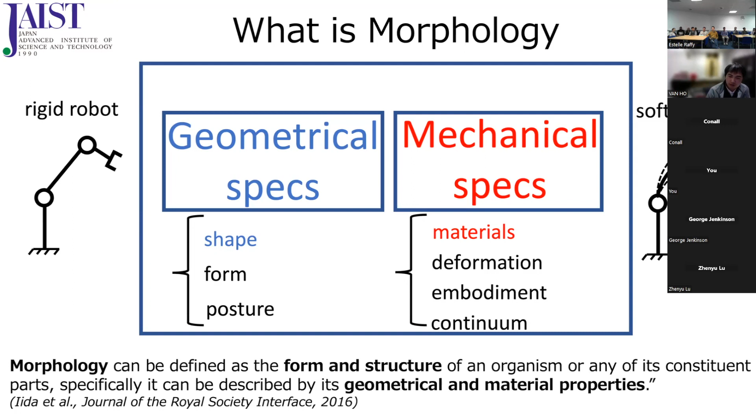So what's morphology? Well, I'm actually the mechanical guy. In my point of view, and also as Fumiya stated in his previous paper, when you're talking about morphology, probably there's another field with a different definition, but point of view-wise, when you talk about a robot's morphology, it should include the geometrical specs, including shape, form, and so on, and also the mechanical specs, which also includes material properties. So we have many definitions or understandings of morphological computation. Here we use the term adaptive morphology, to see, okay, so it can be intelligent or not.

Imagine you have a kind of fixed morphology, like a rigid robot, and it tries to interact with the outside environment. Usually you need to do a lot of computation, right, for, let's say, position control or force control, to make sure the interaction is good. But what if you have a morphology that just adapts to the environment, without any further control and computation? So intuitively you can imagine that the computation you used before for the fixed morphology is kind of offloaded to the body, right, which means the body itself is also part of the intelligence, and the computational burden can be offloaded from the central controller to the morphology, as Rolf also indicated in his famous paper.

So what is adaptive morphology in robotics that I found? Maybe this is related to our previous PhD research, more like 15 years ago. At that time, we used soft hemispherical fingertips. On the right side, you see with the green objects, two soft fingers hold an object, and with all the disturbance applied to the object, it still holds it firmly. Imagine if you have two rigid fingertips, even with small disturbance, the object will fall out of the hands, or else you need to do a lot of complicated control to make sure the objects are stable.

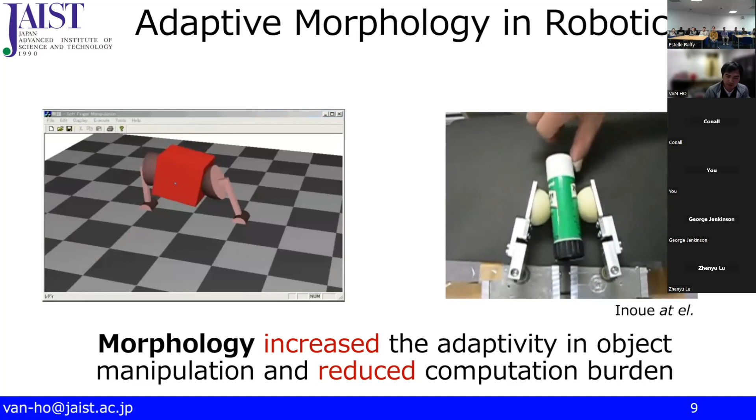On the left side, you see some kind of one-DOF fingertips trying to hold an object. What you can see in this case is even with only one rotation for each finger, you can actually do in-hand manipulation. Imagine if you have two rigid fingers and you want to do dexterous manipulation like that, you need very complicated control, and probably more DOF for each finger. So in my point of view, morphology can increase adaptivity in object manipulation, and I think soft is something very interesting.

So far our research is based on what I explained before, so we'll see how we conduct our research here. We care about the body, of course, and also the environment that the robot works with. Different from ChatGPT, our robot has a body and it needs to interact physically with the surrounding environment - that's something that differentiates our robots from a thing like ChatGPT. We also think that interaction between the body morphology and the environment is very important to realize robotic functions. This is the path we went through when we conducted our research.

And so hereafter we'll try to use our research to persuade you about what I mentioned here.

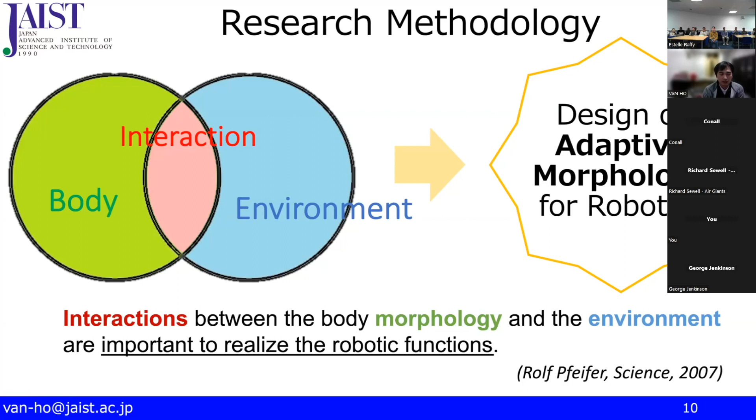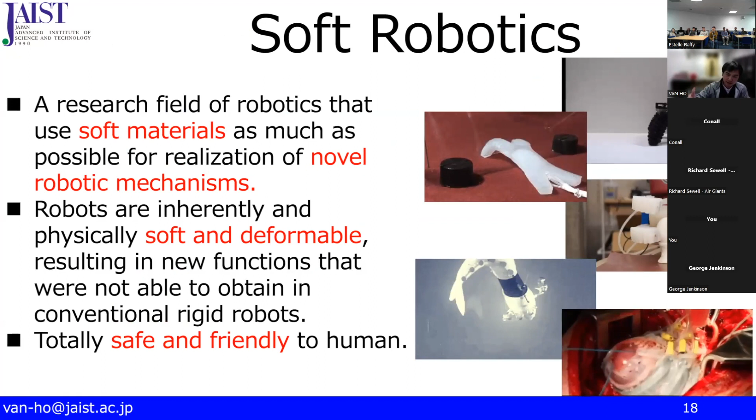As Fumiya also mentioned, there's many kinds of adaptive morphology, even using the rigid body, like the hopping robot that Fumiya made. But also, as we know, soft robotics is very much suitable to conduct or implement adaptive morphology, thanks to the inherent softness and deformation. It's also safe and friendly to humans—imagine something going inside the body, you don't want it to be too rigid. But it's also very challenging to be a completely soft robot.

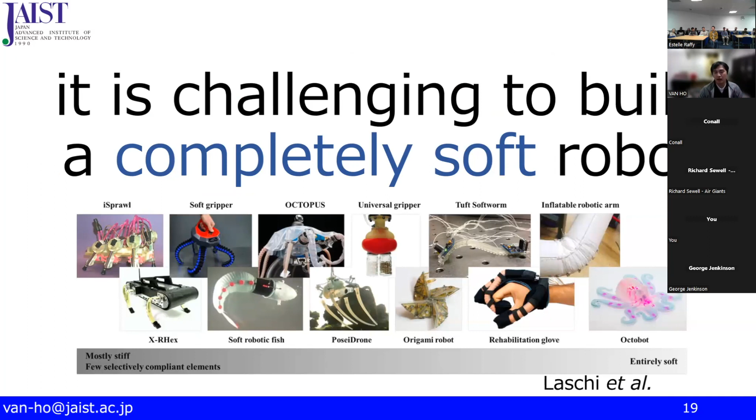This is a very nice summary from Cecilia about the series of robots and their softness. You can see it's mostly a mixture between rigid and soft; there's a very rare system that's totally soft, because we have the computer and everything else as well.

In my point of view, it's very good to introduce softness to the robot for realization of safe, agile tasks. This is what we also focus on, and we focus more on the mechanical approach, not that much on functional materials. Currently we focus on soft sensing, biomimetics, and interaction. I'll try to introduce mostly sensing and biomimetics, and if we have time, I can talk a bit about the interaction point as well.

About soft sensing—this is also one of my long-term research topics, and also maybe one type of morphology computation that Fumiya mentioned before. It's not really about making a specific sensor. What we really care about is how the softness of the sensor may contribute to or realize different kinds of sensing activities, even with active shape changing and dynamic interaction with the environment.

On the left side, you can see that any sensor embedded into a deformable object should not be fixed—it may change its posture and sensing output based on the self deformation and interaction. So if you have a system that can actually change the body, you can expect that with one type of sensor, you can get different kinds of sensing ability.

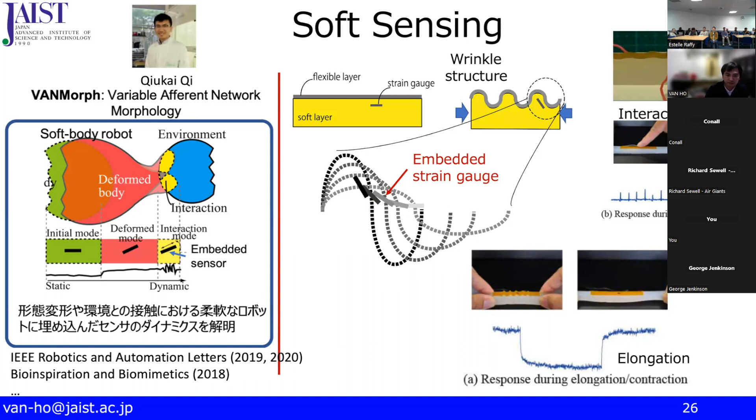Okay, so another kind of sensing that we care about is that soft sensors are very much easy to be damaged. So in this case, what should we do?

We can, based on deformation and morphological optimization, find a way to locally change the morphology, like routing the strain gauge sensor embedded into a whisker. So when the whisker is broken in some part, by tuning the inner pressure surrounding the strain gauge, you can actually compensate for the contact location sensing as well.

This is quite a complicated one, and I cannot explain it in too much detail, but if you're more interested, Helmut is also one of our co-authors, so you can ask him.

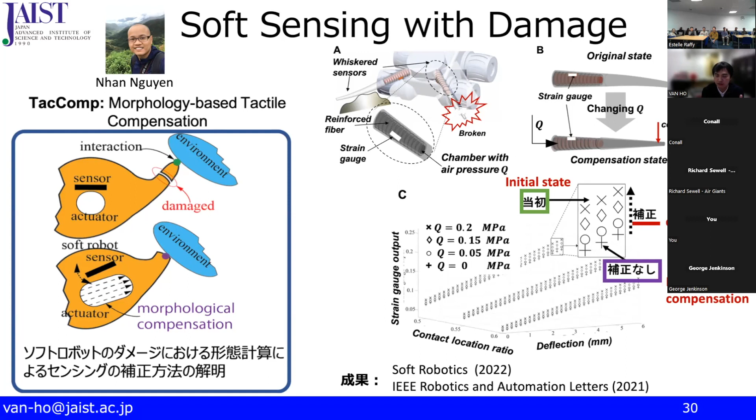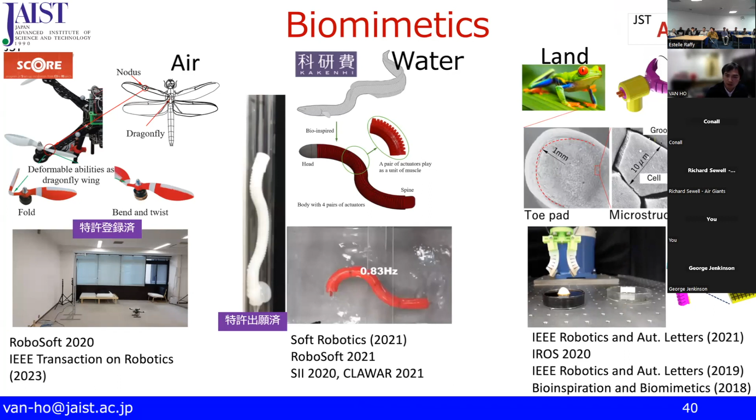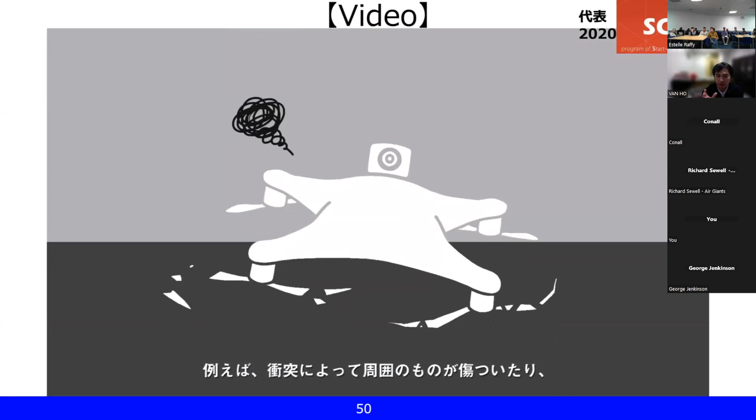Today I would introduce a bit on the drone, and also the gripper. This is a PR video that we made for our research. Usually, you know, drones are a quite dangerous object, because when there's a collision, they may cause damage, and the propellers might be broken and the drone drop off, which is more dangerous for the human as well.

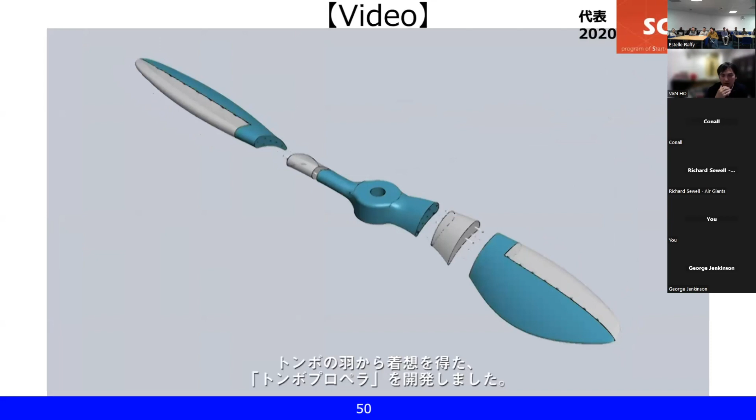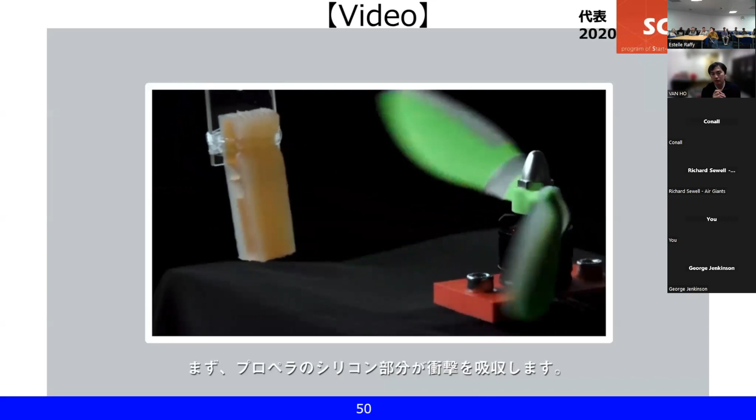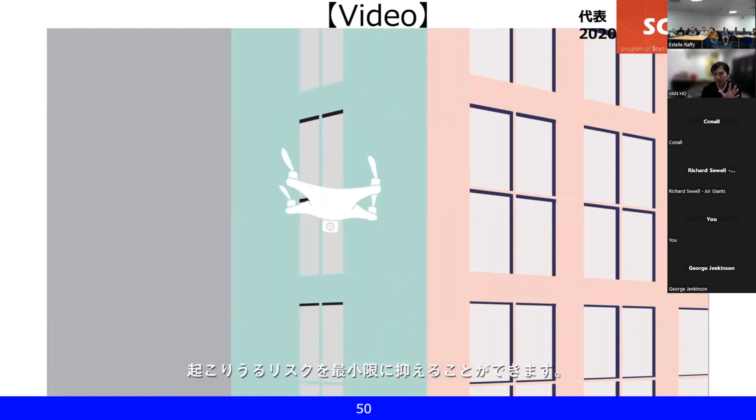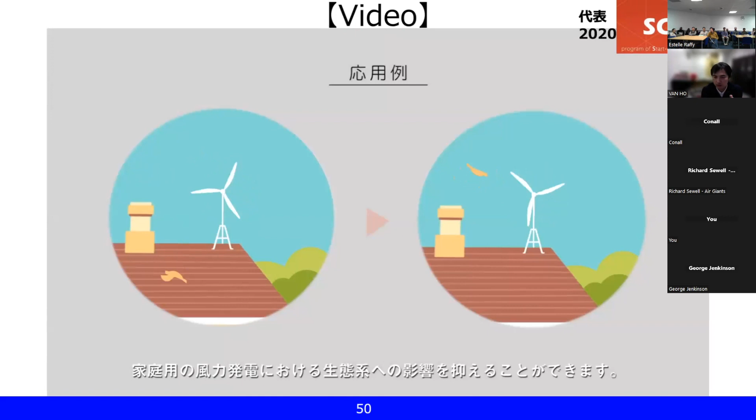So here we were inspired by the Tombo, the dragonfly wings, where they have some kind of hinge that we can actually use to soften part of the propeller, and you can see here the resiliency that we can obtain for the propeller after a collision. So you can imagine if you put these propellers on a drone, even if there's some collision, the propeller will not be broken, so you can recover from the collision as well. This is quite promising if you fly the drone near humans in the future. So this is the animation.

So let's see the real system that we propose. We softened part of the propeller with some kind of silicone, and we also have fiber-reinforced nylon here to increase the strength of the propeller. There's some research that tries to make a totally soft propeller, but in that case it's very difficult to generate enough thrust. So in this case, you can see there's a mixture between the rigid and soft parts.

The number 2 part is where the thrust is created, and only when the collision happens, the soft nodus, which we call the soft hinge, go into action to give some resilience after the collision, as you can see. Because collisions are also very diverse, in this case you can see that under any kind of external stimuli, the propeller can still respond well.

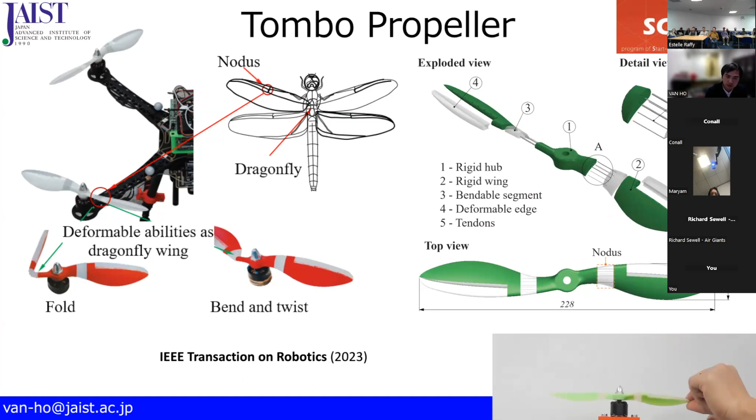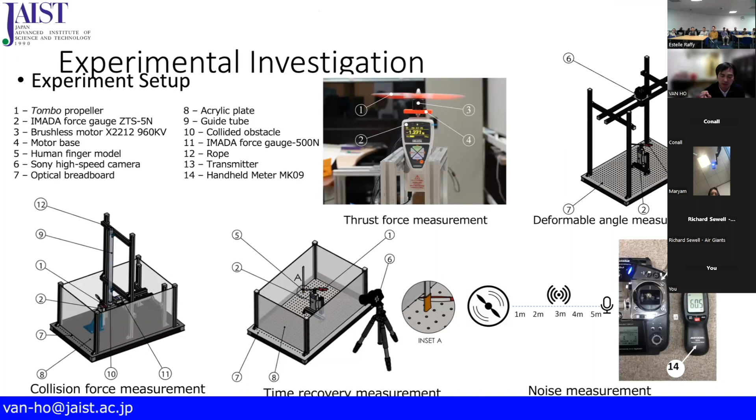So the question is, okay, can this propeller be used for flying a drone or not? That's why we set up a very nice experiment to measure the thrust, the noise, and also the collision and recovery time—a lot of factors. We also created many kinds of morphology of the propeller to test the durability and collision resilience as well. I'll just introduce some parts here.

So if you can imagine having very neat fabrication of this propeller, you can actually expect quite good durability for flying on the drone.

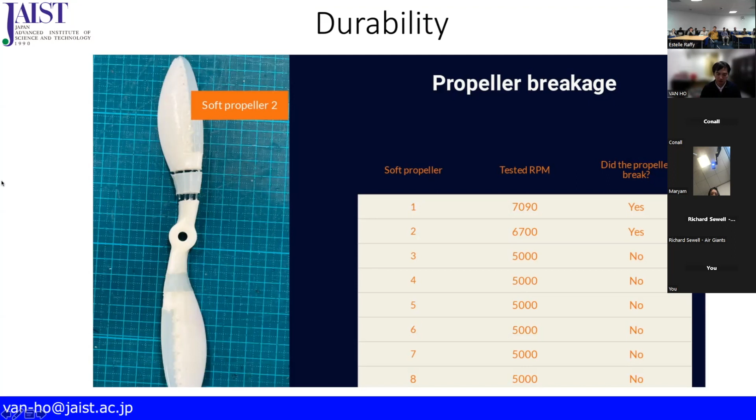You may also ask, is this safe for humans or not? So we tested that as well. Here we have some sausages going in contact with the propeller. At low rotation, like 1,000 or 2,000 RPM, it's still okay, but at 5,000 RPM it's not safe anymore. So I cannot say this propeller is totally safe for humans to interact with, but you can expect that it will reduce the collision force in any case. We measured and found that at least one-third of the collision force can be reduced by using this soft propeller.

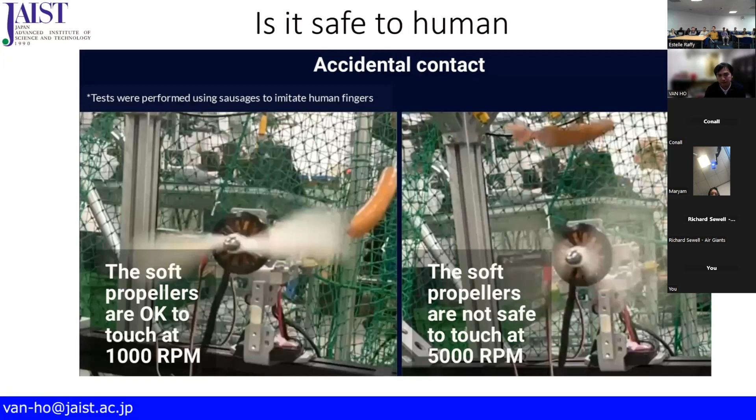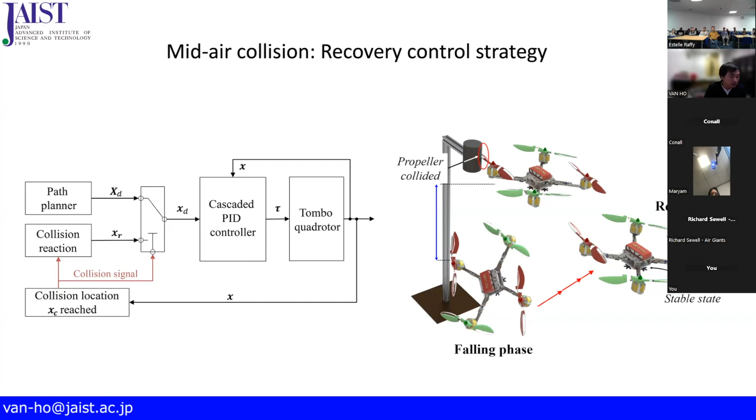So here is how we put the drone on the tracking system, and we also test the recovery and resiliency of this drone upon collision. The control is also very simple: by external tracking system, we know where the onset of the collision happened, and we switch to another control to make sure the drone will go back to the previous state before the collision as much as possible, with the belief that the propeller will not be broken. This is also related to Type 1, the morphological computation, as Fumio mentioned.

So this paper is actually a long-term collaboration with Giuseppe at NYU, and the paper was just accepted this year in TRO. You can see more in terms of operation in this video.

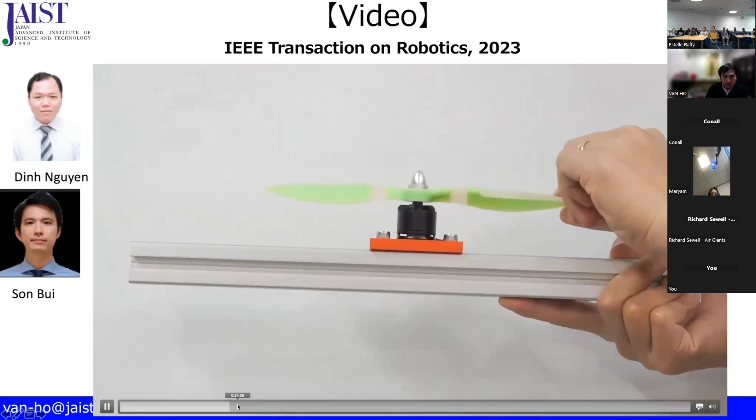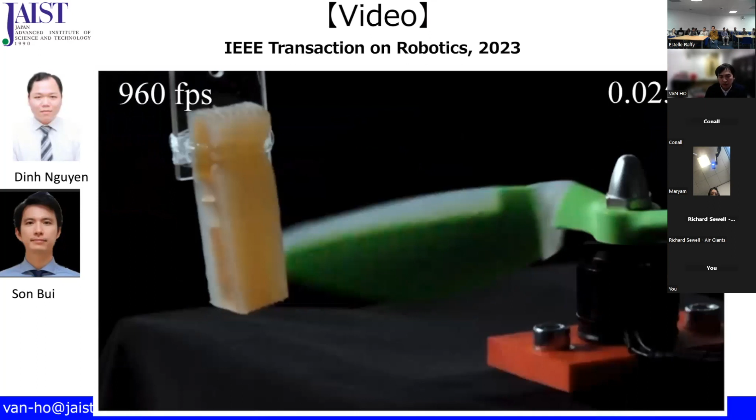So here, with the twist, the folding, bendings—totally okay—and with contact with soft objects, it also can recover quite well. And it's still working for the drone here: a 9-inch propeller works for the 1.4 kilogram drone, which is pretty much enough.

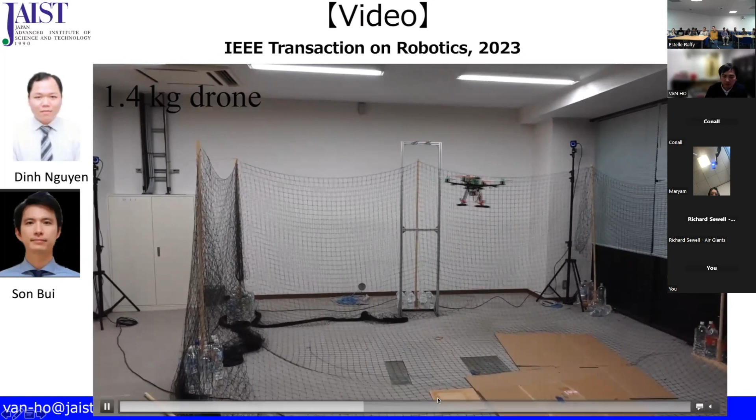The most important thing to see is the collision, and what happens after it. So we flew the drone into a 2-meter high obstacle to see how the drone reacts. Usually the drone would drop. After the collision, the drone may drop a little bit in height, but after that it can recover back to its original state, so the drone will not drop.

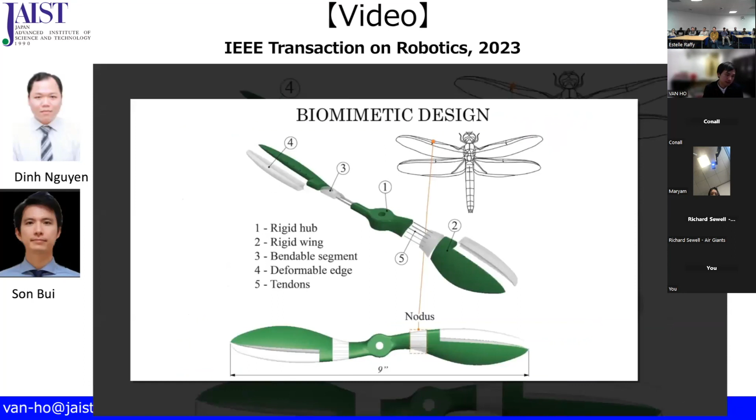I think this should be pretty significant for the system. It's all about the drone with the deformable propeller. You can see here the small deformation. This can actually increase the safety and also the resilience of the whole drone, which is very important for the system.

The other example is our recent development of soft robotic hands or grippers. We see a lot of designs in soft robotics for hands or grippers, like the origami one, the finger one, nets, and also a recent novel design using a tangle mechanism for gripping objects.

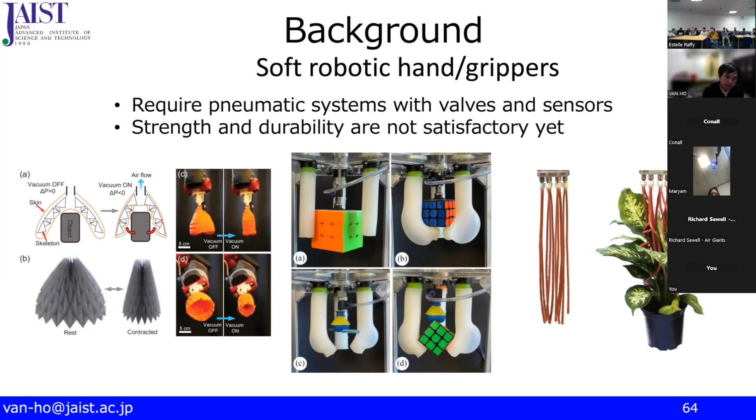Most of us always think soft robots should use a pneumatic system with valves and sensors, but sometimes if there's a scratch or hole, it's done—you cannot make it work anymore. Of course you can use self-healing material, but it will take time to recover.

In this case, we were inspired by the blossom of a flower. If you look back at the blossom system, it looks like twisting, or rotation.

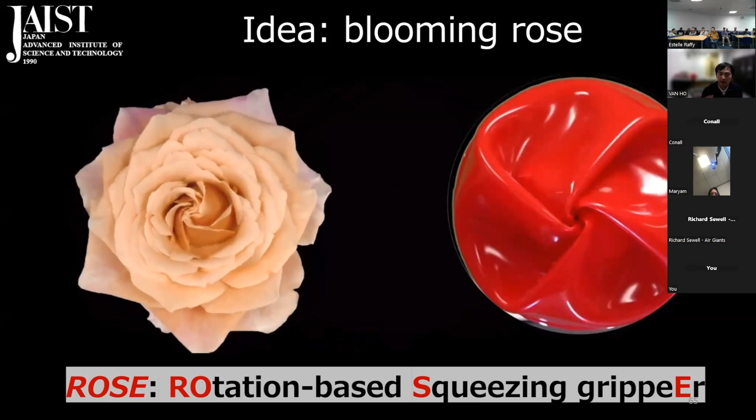So here we propose ROSE, which we call a rotation-based squeezing gripper, and we try to make it look like a rose. The name fits the shape quite well. With normal rotation and buckling of the surface, it actually closes the gripper and can embrace the object.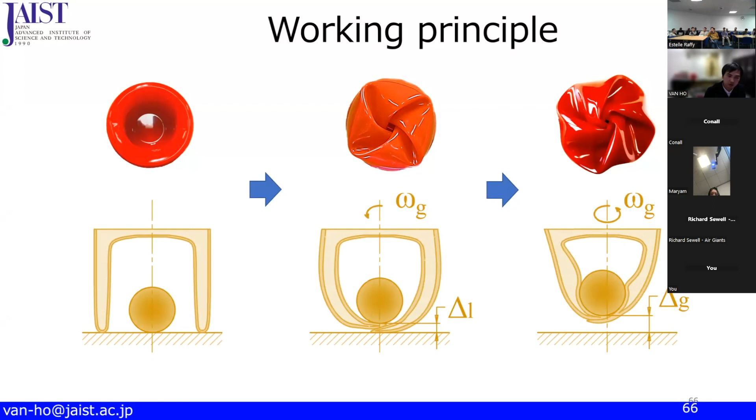This is the working principle: any object goes into the space formed by a funnel-like shape, and then you start rotating it. It buckles from inside to outside and starts to squeeze the object. At that point you can be confident to lift the object without any complicated control strategy. This is the design process.

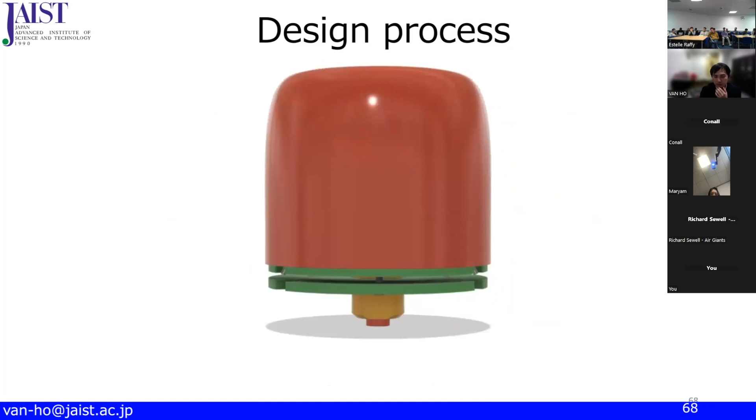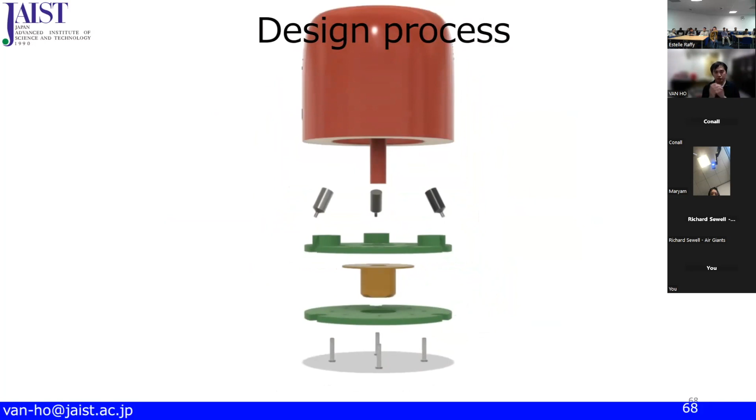You can see this continuous membrane from inside to outside, looking like a flower, and also like a funnel. The parts are very simple: we only have the funnel, the fixed base that holds the outer layer, and the inner base that can rotate. You rotate this inner part, and the buckling happens from inside to outside, finishing with squeezing the object. That's the whole idea of the design.

We have embedded cameras to see markers, as shown in the design before, to observe how the buckling happens and the state between the object and the finger. These designs are very simple. Let's take a look at the performance.

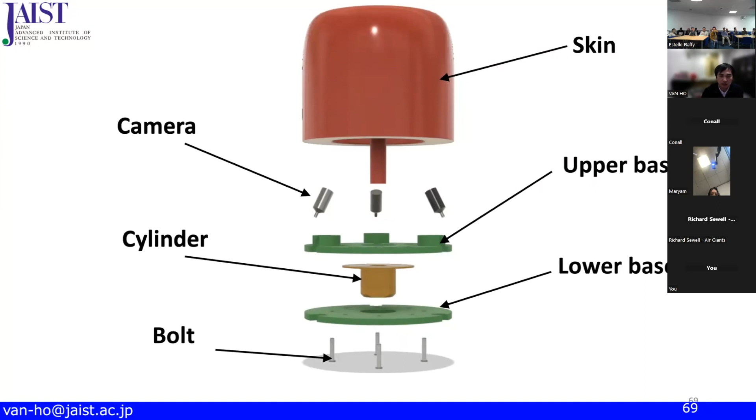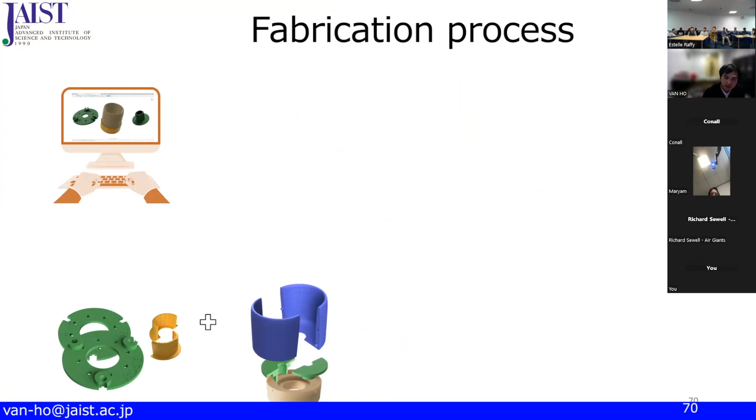For fabrication, we went through many methods, but they didn't work very well. Eventually we came up with a simple method: we just pour it from the top, and due to gravity it goes down and covers the surface, then cures under certain circumstances. If you want to change the thickness, you can pour it one more time, or even three times. Due to gravity, the tips end up much thinner than the base, which is good for making the buckle happen easily.

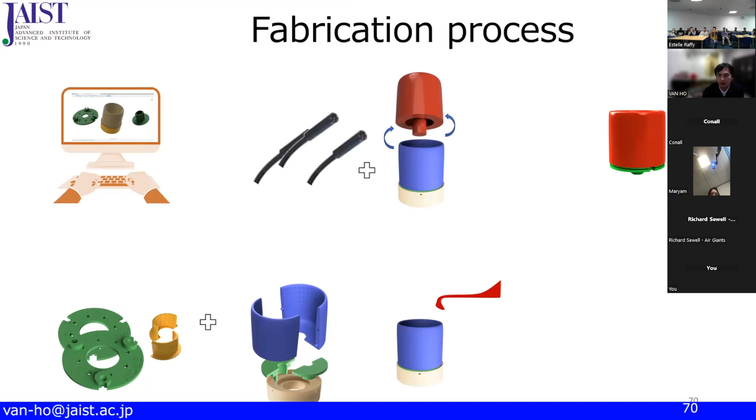After that, you just take it out—it's a one-shot fabrication, and you get the entire skin. You can scale this quite simply with this system.

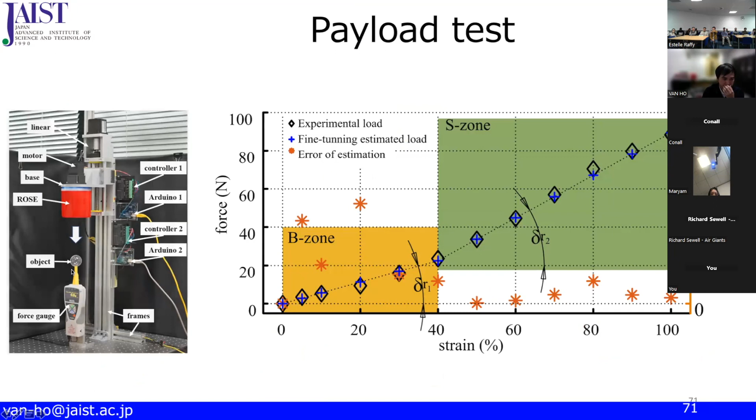We also tested with payloads. For this payload test, we tried to pull an object, attaching a force scale, and surprisingly it only broke at more than 300 newtons. So for this pulling test under very nice conditions, with a several-hundred-gram ROSE gripper, you can grip about a 30-kilogram object.

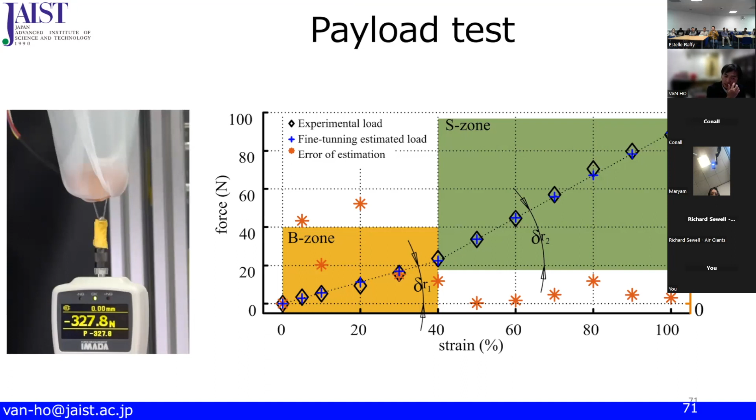I don't say it can grab a 30-kilogram object anytime, but in this test, maximally it can go to 30-kilogram force, which is quite amazing for a soft object.

We also tested the repeatability. One nice thing about this design is that we use rotation, so you can use the rotation from the end effector of any kind of robot arm. It's like plug and play, and you can replace it within like 5 seconds. You plug it in, rotate, and it works for you. Of course you need some change in terms of rotation speed and angle, but basically it takes very little time to change.

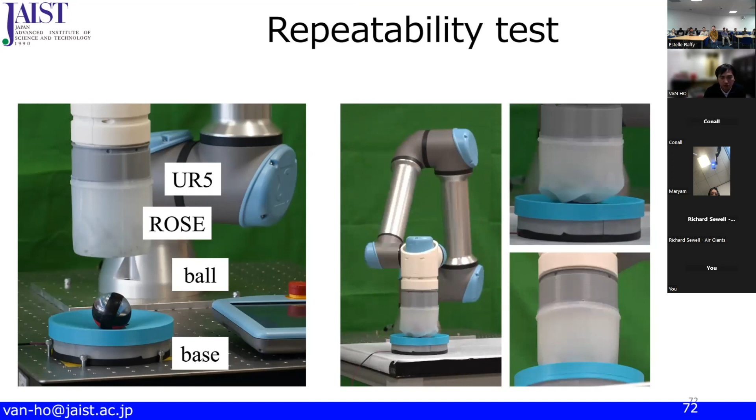So we tested with this task: take an object, pick it up, and then release it. And I guess how many times we could do that. It can be durable up to 400,000 trials, which is quite amazing for me as well.

After 400,000 trials there's some kind of crack here. But the good thing is, because this design uses no air, even with a small crack the buckling still happens, and you can still grab the object without any change or complication in control.

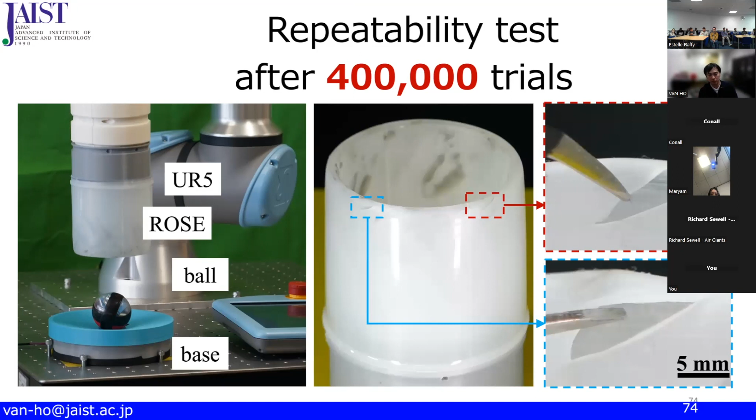So this is a demonstration of the grabbing. The related content was presented at RSS this year, and it was also a best system paper award finalist.

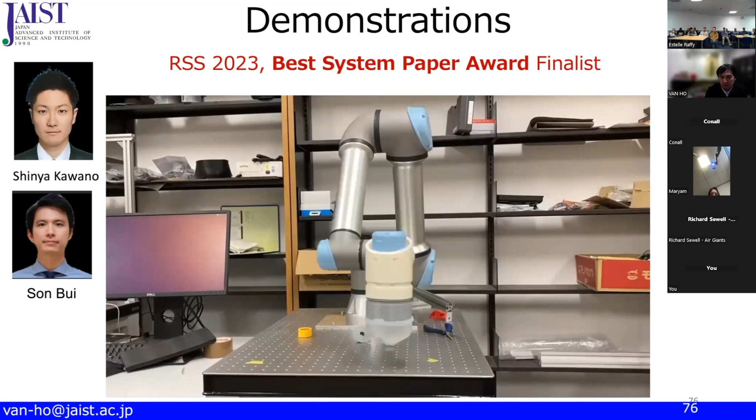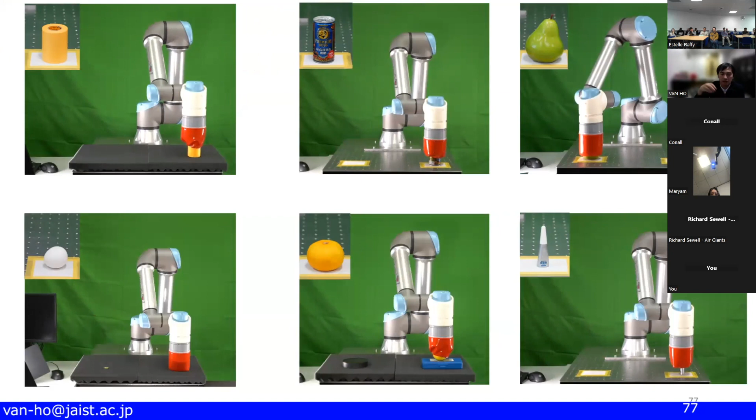You can see here how you can grab an object, place it, take it away, and place it on another one. Quite simple, right? As long as the object is small enough compared to the size of the gripper, you can change it and grab any kind of object. We tried it with different kinds of fruits, cans, and other soft objects.

So you can imagine using this for harvesting fruits on trees, something like that, and even working at an assembly line given all the durability it performs.

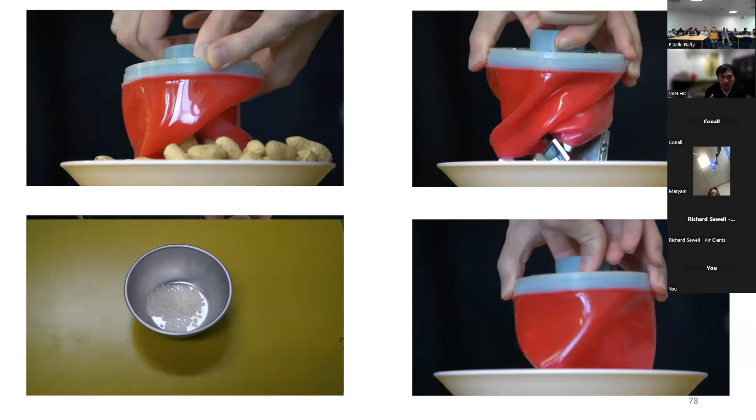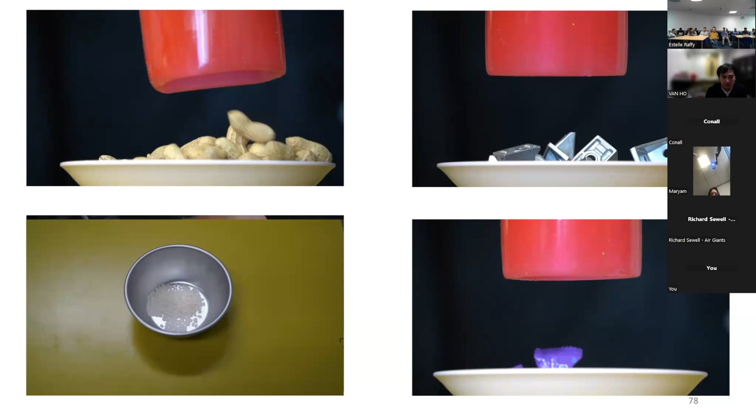It also can work with granular objects. With the squeezing action based on the rotation, whatever is inside the gripping space, it can get it. We also tried a very difficult task: taking a boiled egg out of an olive oil tank.

This is already very difficult for humans, because it's very slippery and almost impossible to use chopsticks in this case. But using this gripper, because it can squeeze everything inside, even in very slippery conditions the roll still works and brings everything in, grasping the object with a very simple design. I think this is also a very typical example of the type 1 that Fumiya mentioned, on how we can simplify the controller but still get the work done.

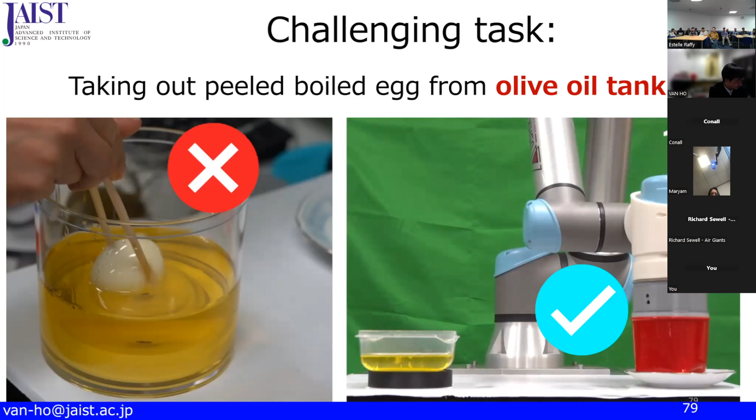For the robot. Okay, we have about 5, still have several minutes left. So I'll move on to some of the interaction work we've been trying to do so far.

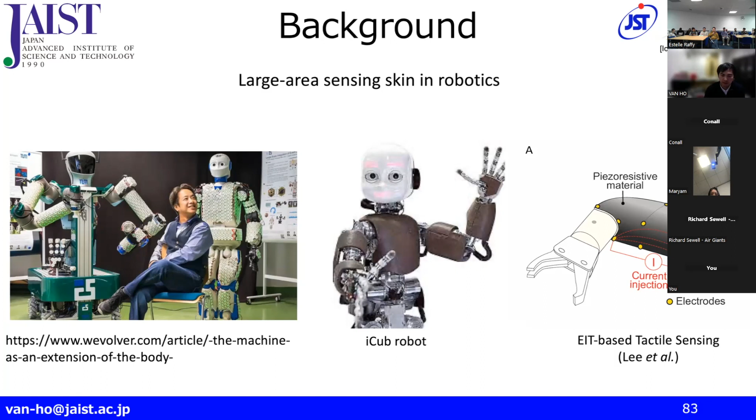We want to make a large-area sensing skin for the robot. Usually, for large area skin, you need to tie up many sensing elements, which causes a lot of difficulty in wiring and data processing. We also think of Baymax, something we wish could be in our life—working close to humans, interacting safely with them, with softness and whole-body tactile sensing like that. So we hope we can do something like this.

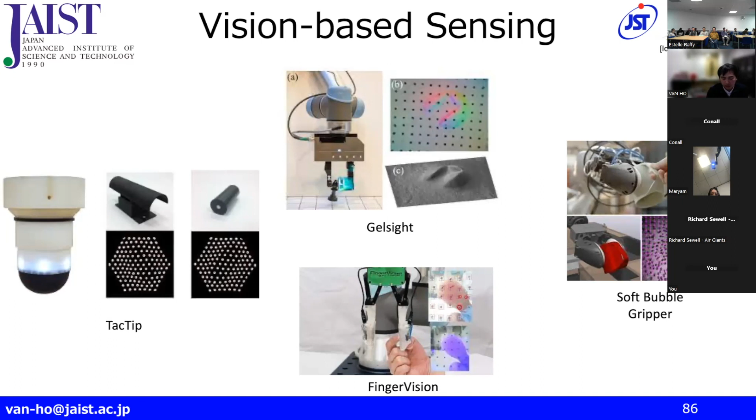We all know about vision-based tactile sensing, like TacTip from Nathan at Bristol Robotics Lab, and also GelSight, FingerVision, soft bubble, and other things like that. But these systems are only for small scale, like a robot finger and hand. Our aim is a bit bigger, like the whole arm or whole body. Using a vision-based camera you can do a lot of things with a simple design, and with computer vision and machine learning approaches, you can do a lot as long as you give a good design for the system.

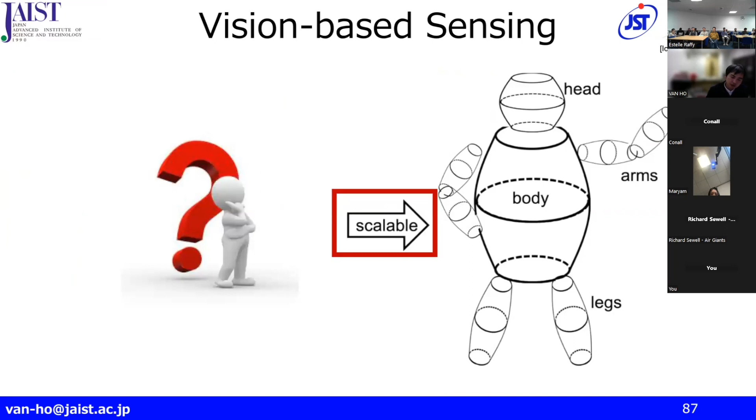So our aim is to build a system that can be scaled up to the whole robot body—arm, legs, something like that. We came up with a barrel shape, like a robot link or a human arm. We have a soft skin, quite long, and two cameras placed at the two ends. These two cameras track the change in position of the markers inside, quite similar to TacTip anyway.

Based on that, we can construct a three-dimensional model of the skin, including the deformation. So we know where the contact happened and what the contact depth is. We actually made one with a bone, because the robot usually needs some strength. But since we have two cameras here, we cannot use a normal bone.

But if you use some kind of transparent pipe that's stiff enough, you can let the camera see the soft skin surrounding it, while still giving enough stiffness and strength for the whole robot. We hope with the barrel shape we can scale up to the whole body of the robot with this technology.

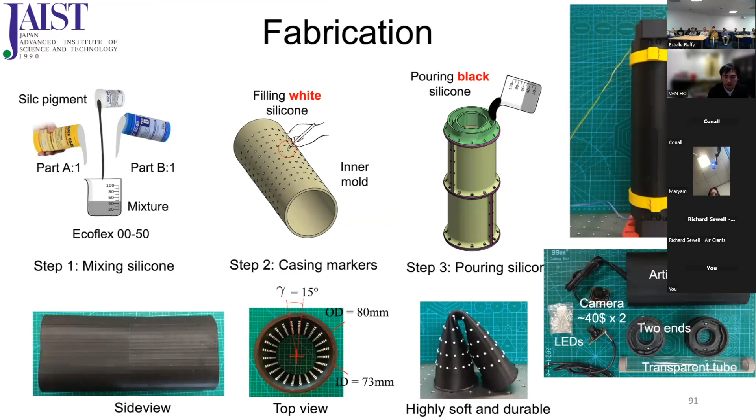So in terms of fabrication, we spent a lot of effort, but with the technology we have, we can mold all the markers and the skin at the same time. The skin we made here was probably made 4 years ago, but it's still here and can still be used in our system now. So the durability is very much amazing with this fabrication process.

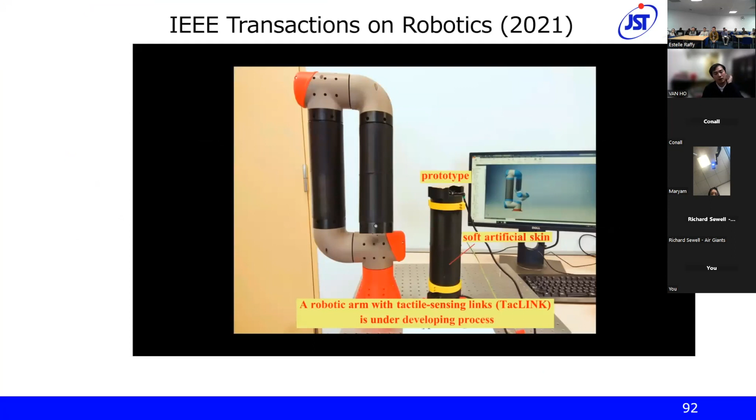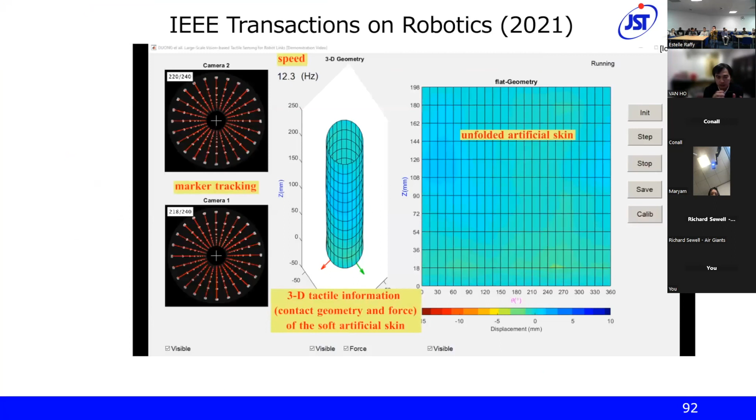This is our first paper on this system, where we use an analytical approach: we build up an FEM model, take the deformation information, and try to synthesize it into the normal force using the FEM method. This is real time.

This is real time, and you can see how it can detect pretty much the interaction between the object and the body as well. But it's quite slow because, as you know, FEM is very time consuming in computation.

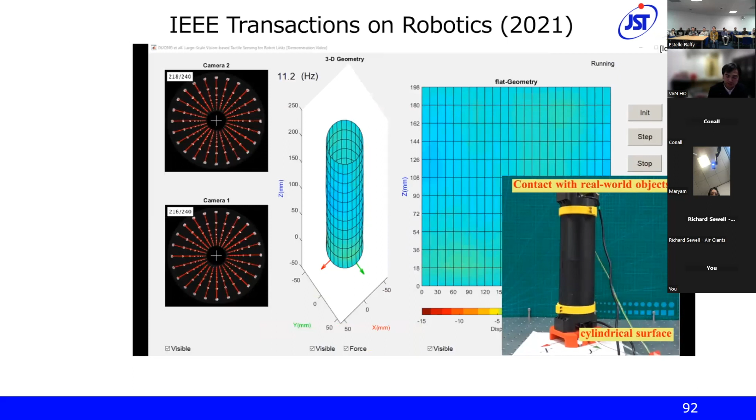So we came up with another way by developing a digital twin of this system. We use SOFA to represent all the mechanical properties, and transfer all the data to Gazebo to use the virtual camera model to get the simulated image. With this pipeline, we can represent all the physical properties of the system, including the skin and the contact between the object.

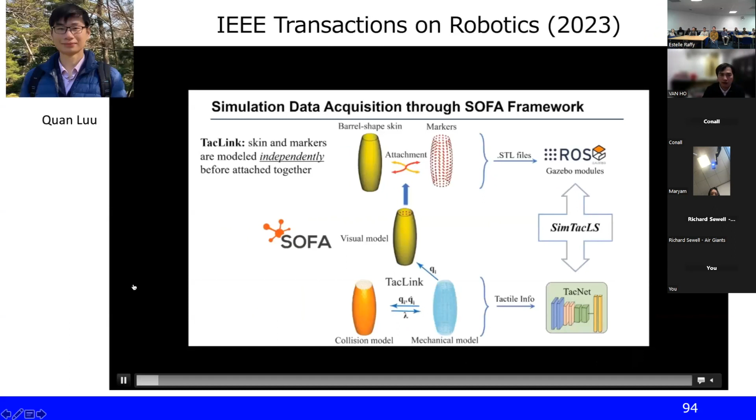Here we can collect all the data, train a TacNet, and realize some kind of contact action. This is the whole pipeline that we propose. I don't have enough time, but if you want, you can check our recent paper on TRO.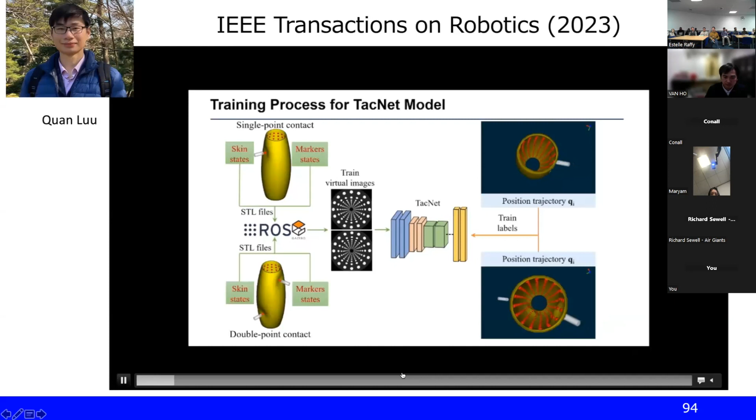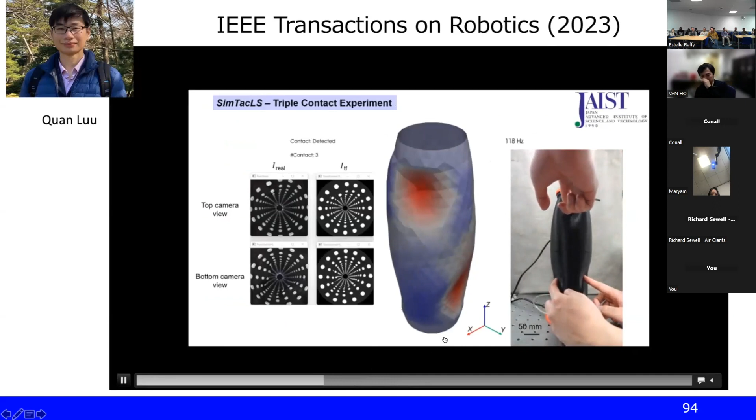This is how we can collect the data from SOFA and ROS, and then we train the TacNet, which is not that much difficult. You can see here how with this one we can increase the sampling rate quite a bit. With the FEM-based method, it's a maximum of only 10 Hertz, but here we can increase up to 120 Hertz or something like that.

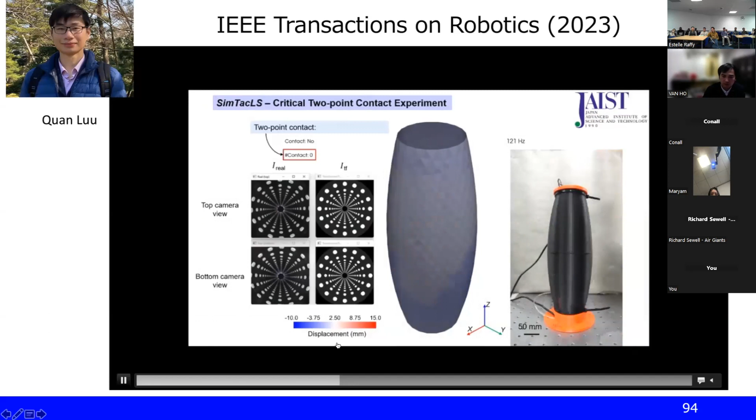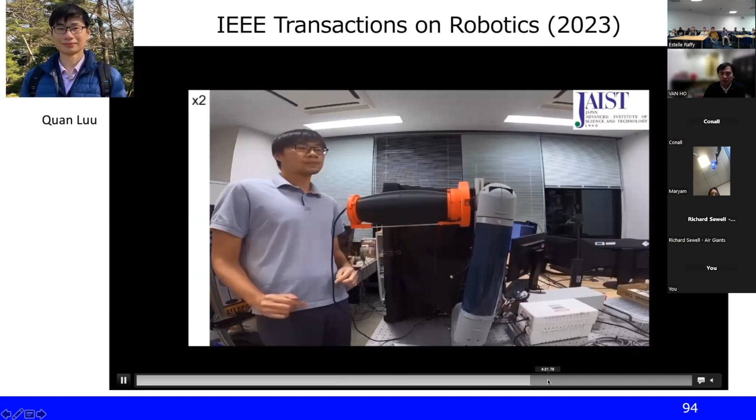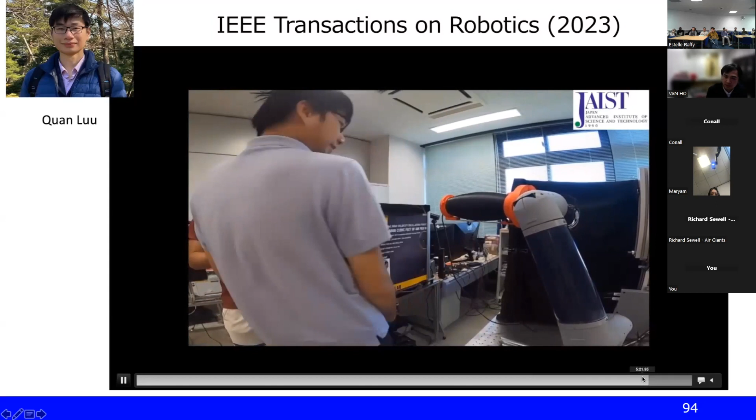And then we can actually use this in some kind of manipulation, and also in terms of human-like interaction, like teaching, and also in terms of safety. Because, you know, with the contact, it can actively change the way of moving, so as to reduce the risk of interaction.

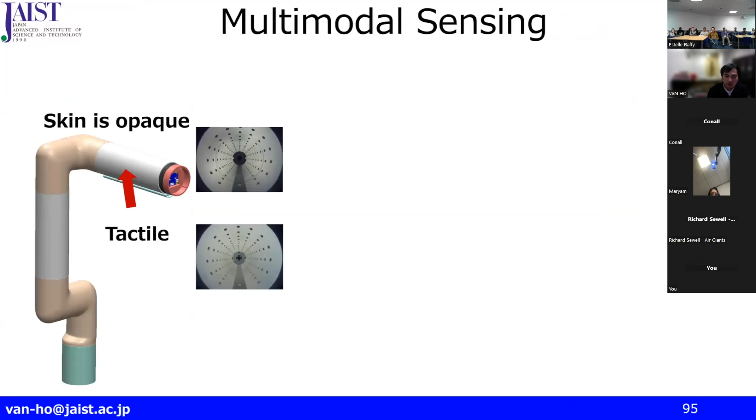Okay, so we have also another point. I don't think I have enough time, but here we also implement proximity sensing for the system.

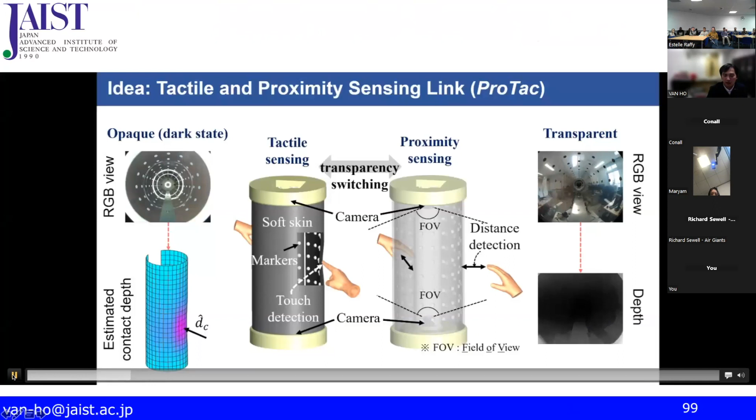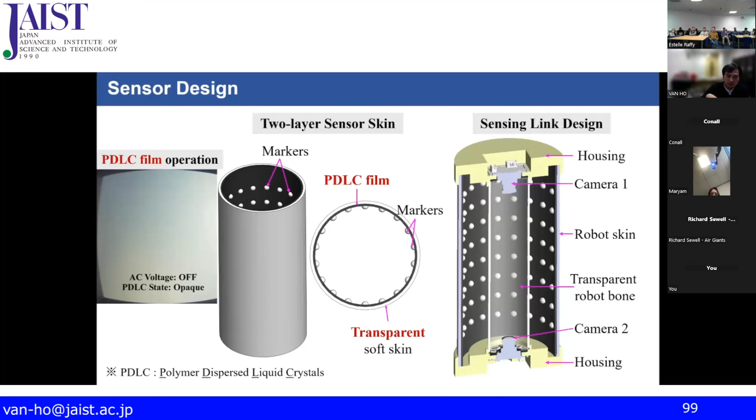By changing the transparency of the skin, you can see that if the skin is transparent, the inner camera can see outside. And when the skin is opaque, you can see the marker. So with the same system, you can have tactile and proximity sensing at the same time.

Which is very promising for us. You can see how our skin can actually switch between transparent and opaque in less than 1 second.

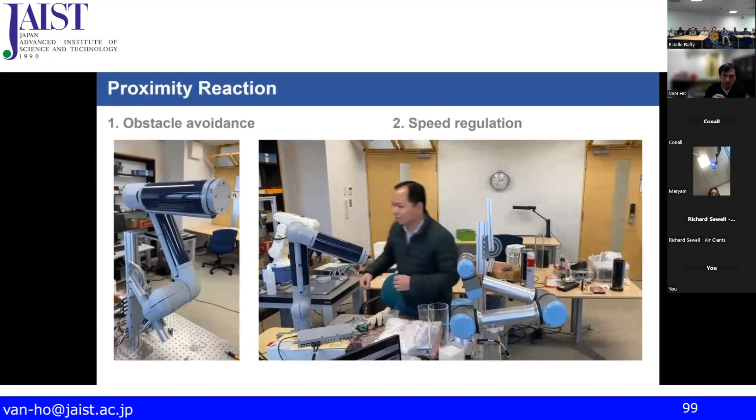With that, we implemented a scenario where something is going near the robot with no external camera. So we know how to move and when to stop.

Okay, I think it's a bit ahead of time. But with all the morphological computation, adaptive morphology, bio-inspired design, and the interactive idea here, we hope in the future we can make some kind of robot like Baymax, that can be used widely.